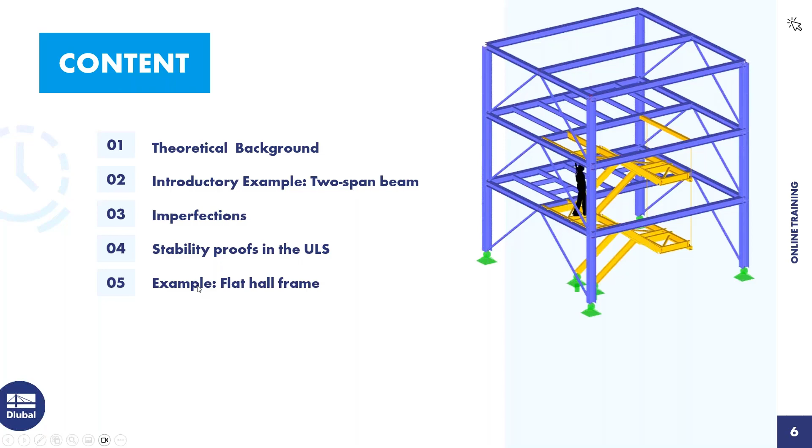So to the content today: at first I say something about the theoretical background. Then we start with the first example, a simple two-span beam. I say something about imperfections, geometrically nonlinear analysis or second-order theory and so on. Then I say something about the stability proofs in the ultimate limit state design. And we finish the online training with the second example, a flat hall frame.

Okay, before I come to the products for design according to Eurocode 3, I have one question. How much experience do you have in steel design? I start the poll. Just click on the button that is valid for you. I give you some seconds. Just click on the button professional, or it's new for me, and so on. Okay, then I close the poll.

So that's the result. I'm professional, 33%, but also 33% checked it's new for me. Okay, I hope also the professionals will learn something about steel design today.

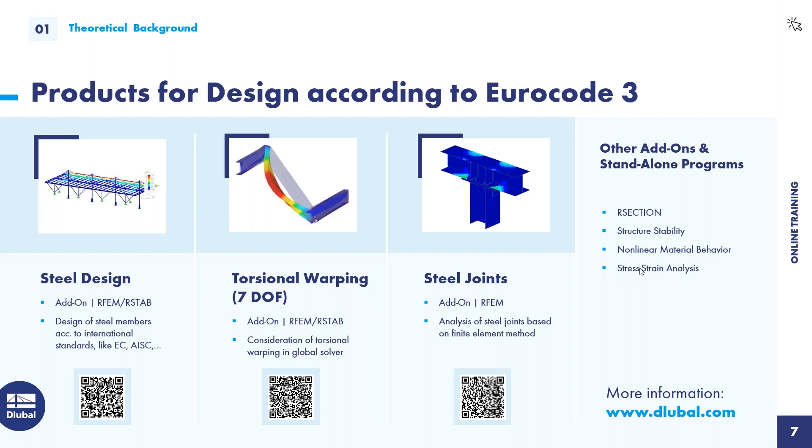Okay, a little insight into the whole safety concept in steel construction. The actions should always be smaller than the resistance. In addition, we have certain coefficients that we have to take into account depending on what type of proof is used. For example, for the stability analysis, there's a different safety factor for the basic standard and the national annex of Germany. Just consider the national annex of your country. But I believe in most cases it's the standard factor from the Eurocode.

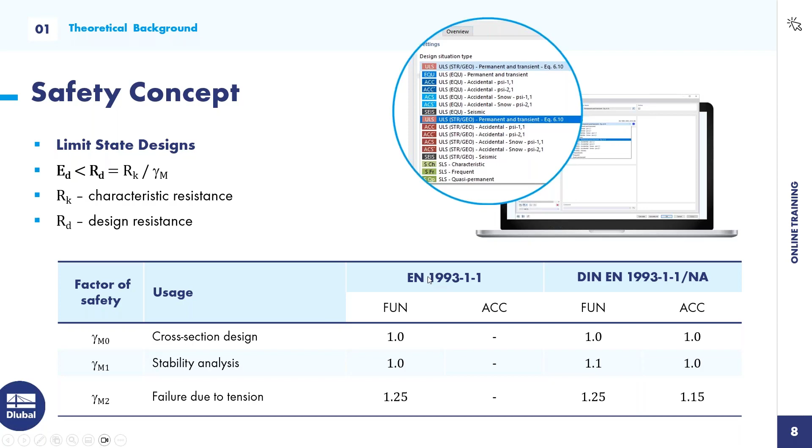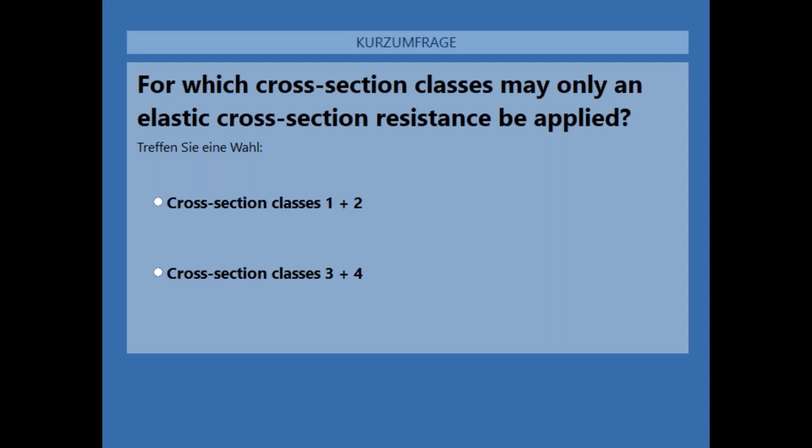So I close the poll. Really good. All of you checked the right button or gave the right answer. Great. Okay, then we turn to the next slide.

Two-span beam. That's the first simple example. It's a two-span beam. The beam is an IPE 550, and I've got 2 load cases. And tasks are cross-section classification, cross-section design checks, difference between elastic and plastic cross-section resistance. Means the design check elastic elastic, and elastic plastic.

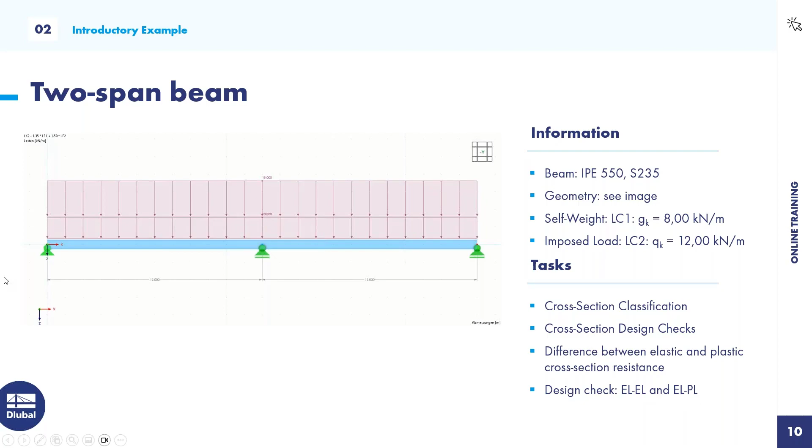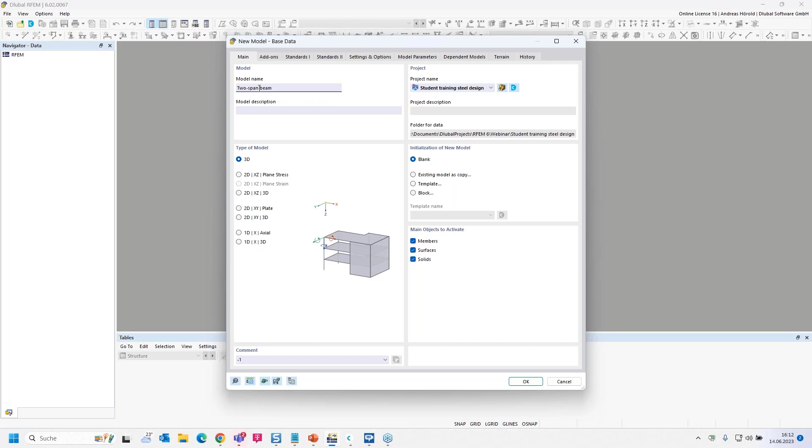Okay, let's turn to RFEM 6. I create a new file here, left above, file new. So the model name is two-span beam. I use the 2D model. That's enough for this example. It's only one beam, plane stress. Then I activate the add-on steel design.

Standards. Okay, I checked the German National Annex. You can see there are also different standards available for the load case classification. I select the Eurocode and the German National Annex. The same for the load wizards, but we don't use any load wizard in this example. Doesn't matter. Then here the different standards, the international standards, as I mentioned. I use the Eurocode and the German National Annex. That's all. Okay.

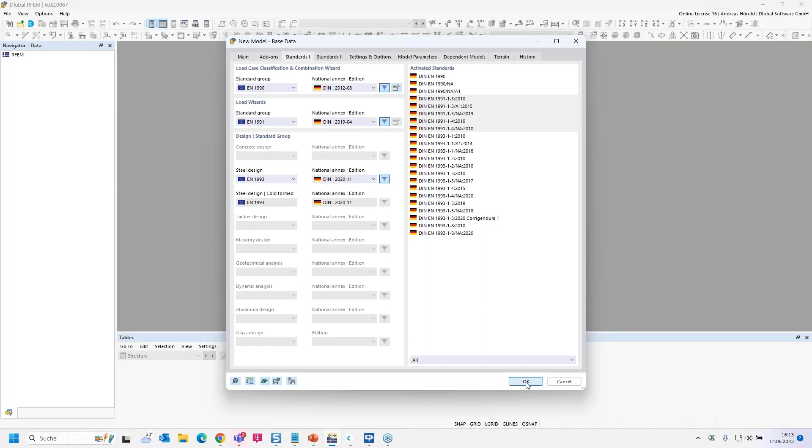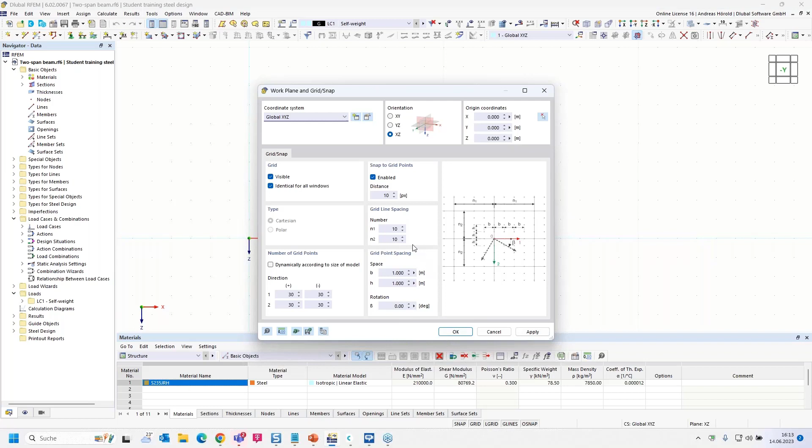So then I change the work plane or the visibility view in reverse Y direction. Zoom a little bit in. Okay. The grid, we can check the grid. The space is 1 meter. Here at the bottom, grid. I open the dialog, and the grid of 1 meter is okay. Okay, then left above, new single member.

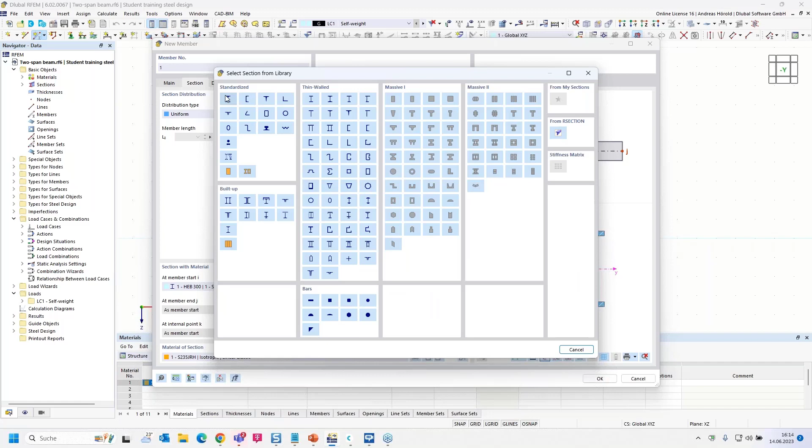Beam is okay. Then we have to define the cross section. There's already an HEB 300, and we change it with input from section library. We open the library. Standardized, left above. And I choose, as I mentioned, for example, this one, IPE 550.

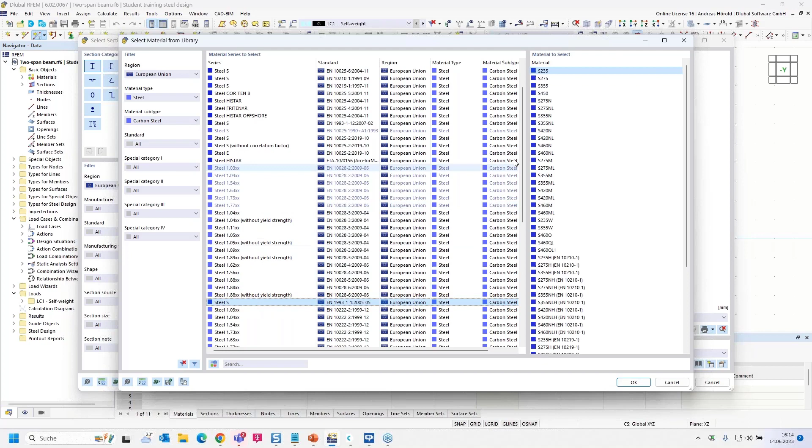And I need to select the material. There's already S235 selected, but I open also the library. So European Union is okay, steel, and I choose any steel that I want, or I check on the left side carbon steel and the simple steel S235. Okay, so that's all.

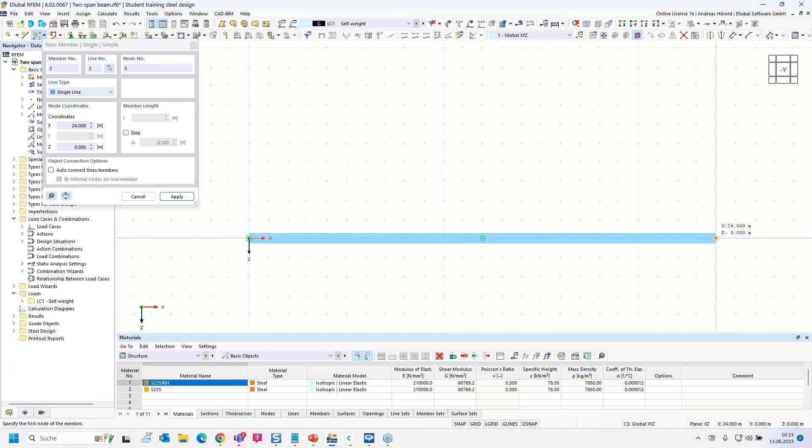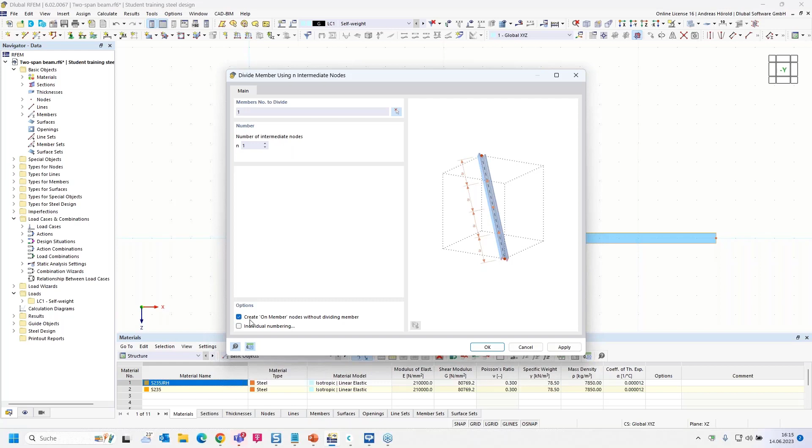So now I create the beam, the whole beam, 24 meters. Okay, and I divide the beam here in the middle with right click on the beam, then members, divide member in intermediate nodes. One node is okay, and I don't divide the member, I will only create a node on the member. That's why I check create on member nodes without dividing the member. Okay, so that I can apply a support here in the middle.

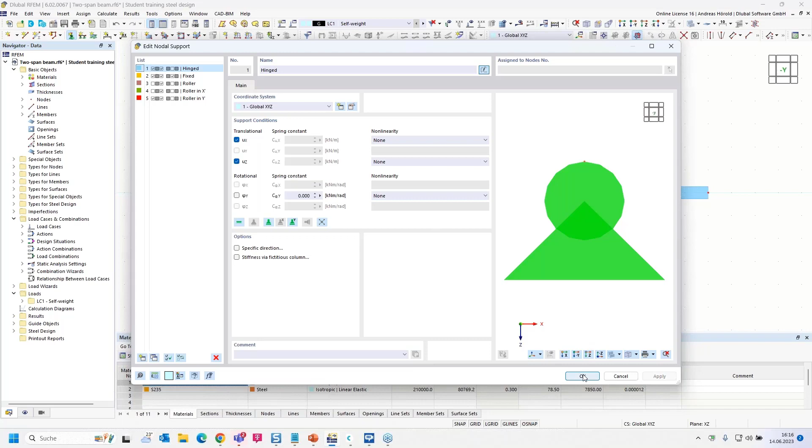So we start with the first support here, left above, assign nodal support. I click on it and let me check the proposed nodal support. Yeah, that's okay. Translational in longitudinal or in X direction and in Z direction. Okay. This one. Okay, it's very small. That's no problem. I right click on it and increase the size of the support. It's only a display setting.

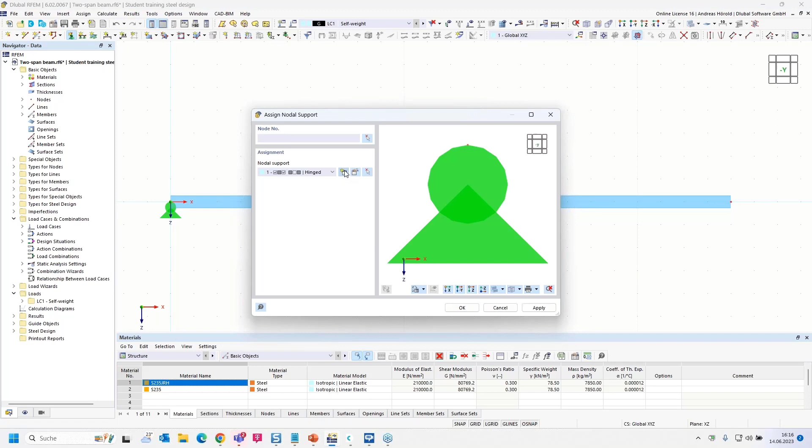So then the next supports, I define a new support. It should be fixed in Z direction, but not in X direction. Okay. And I select this node and this node. Okay. We finished the beam. The self-weight load case is already created. I enter a new member load here at the top. New member load. 8 kilonewton per meter in Z direction. Okay.

Just a hint, if I'm too quick for you, we think that it's best that you only watch the webinar without any modeling, and later you can go through the webinar with the recording. We provide the recording, and then you can stop the video and model not so quickly. And that's the sense of such online training.

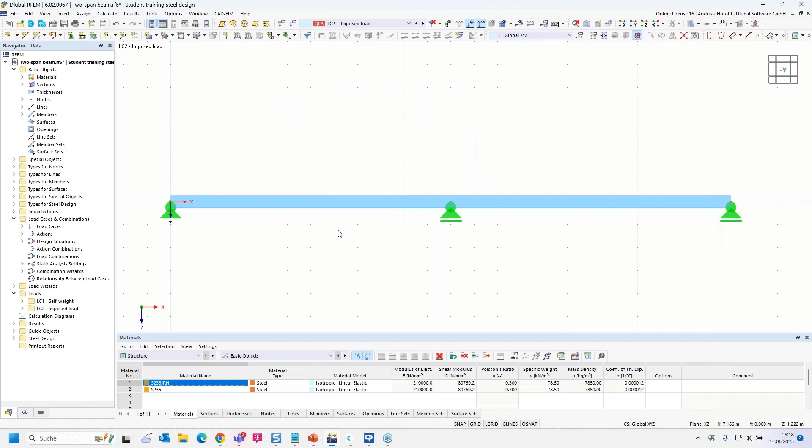Okay, then here above, new load case. And with a click on this button, we turn to the load cases and combinations. I enter the next load case, imposed load. I call it also imposed load. So, action category is okay, name is okay, and I can leave the dialog. Okay. And then I enter the next member load. 12 kilonewton per meter in Z direction. Okay. So that's all. We finish the beam and the loads.

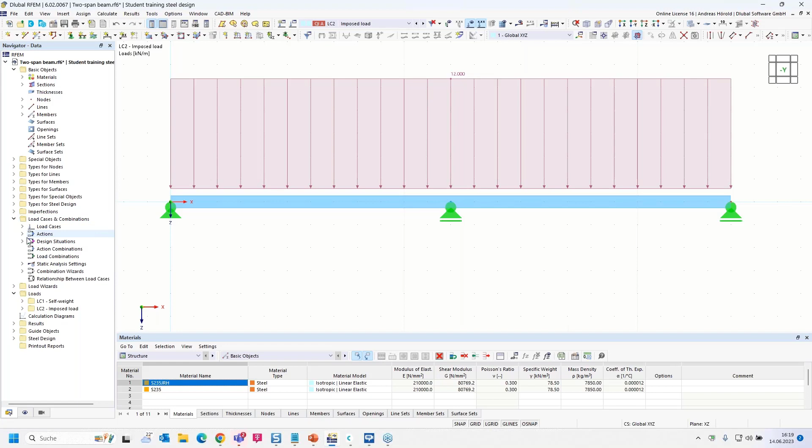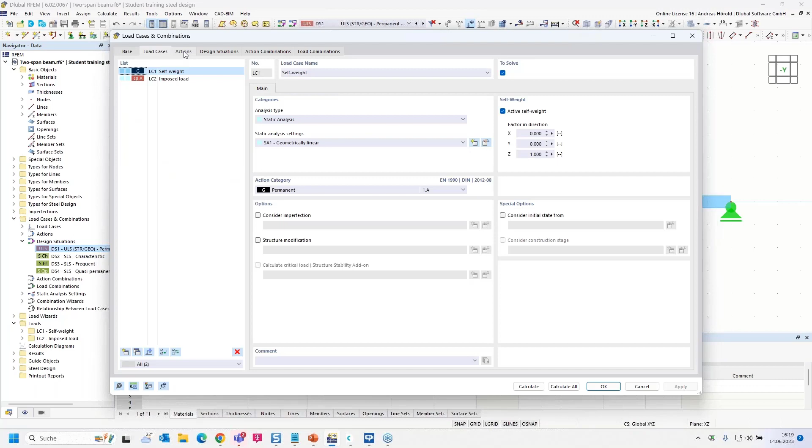We turn on the left side in the navigator data. We open the design situations. Now we open the same dialog. Those are the load cases. Those are the base data, the standard group, and the national annex. And we would like to use also the combination wizard. So we have got two actions and those design situations.

We would like to do only an ultimate limit state design. That's why I select with the Shift key all the three serviceability limit state design situations and delete them. Okay, the steel design is already checked. That's okay. Then there are action combinations and the load combinations. Only two load combinations. So then I can calculate all.

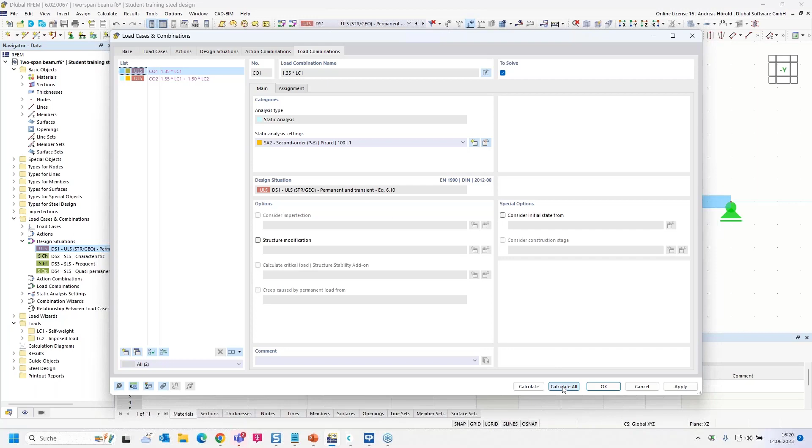So then let's take a look at the results for the ultimate limit state design. Here on the left side, you can see the two deformations, minimum deformation and maximum deformation. Now we have got two combinations. So I can check the envelope values, and I can also display only the maximum values if I want.

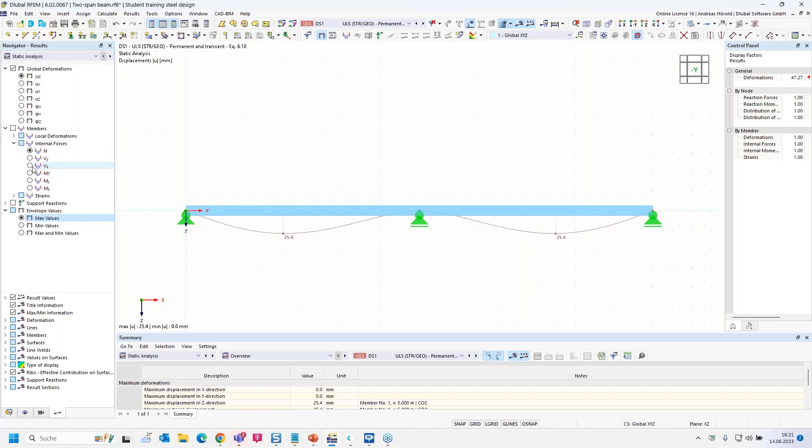So then members, let's take a look at the internal forces, the shear force, and the moment My. Okay, that looks quite good. At the bottom, we check the steel design. We can see the message here: no effective lengths or boundary conditions are assigned. The stability design could not be performed. Yeah, we want to do only a cross-section design.

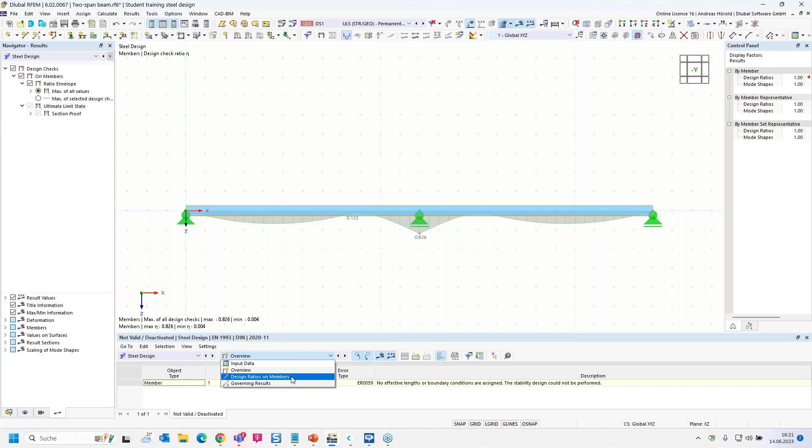Now, we assume the beam is supported in horizontal direction, and we do only a cross-section design. So that's why we go to the design ratios on members. You can see the two checks, the section proof shear in Z-axis, and bending about Y-axis. Okay.

So then you can double-click on such a line, or you can open the details with that button here. I check the button. And then you can see all the equations from the standard. Also for the shear design check ratio or design.

And you can see the section classification. It's class 1. That's why a plastic design, you can see that here, is possible. Plastic design also for the section proof bending about Y-axis.

Okay. And you can also print such equations with the hint where you can find it in the standard. With that button, print to the printer or to PDF or to the printout report. Students request a detailed presentation of the proofs, and that's possible. Okay, class 1, plastic design.

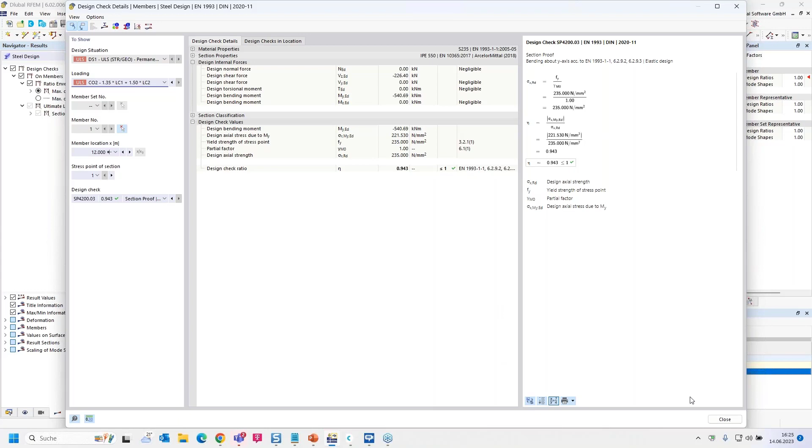So we have now learned how to carry out a cross-section check and how to take the elastic or plastic design into account. At first we did the plastic design, then the elastic design, as I mentioned, voluntary. And in addition, we now know how to display the design formulas and compare them with our own manual calculation.

So let me start the last poll for today. The question is, the elastic-elastic method applies to all cross-section shapes and can therefore always be used. Just check the right answer. Now remember that we did at first a plastic design and then we did an elastic design voluntary. Okay, then I will close the poll.

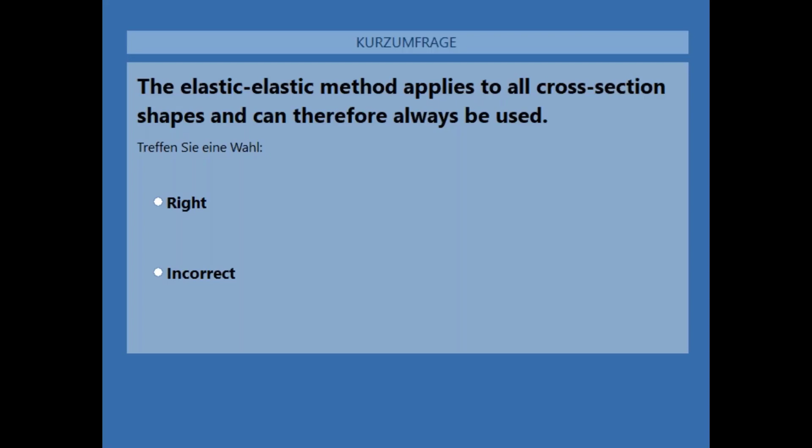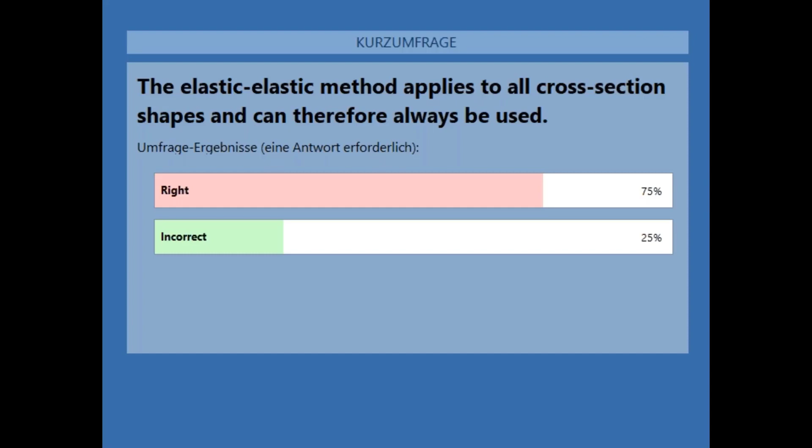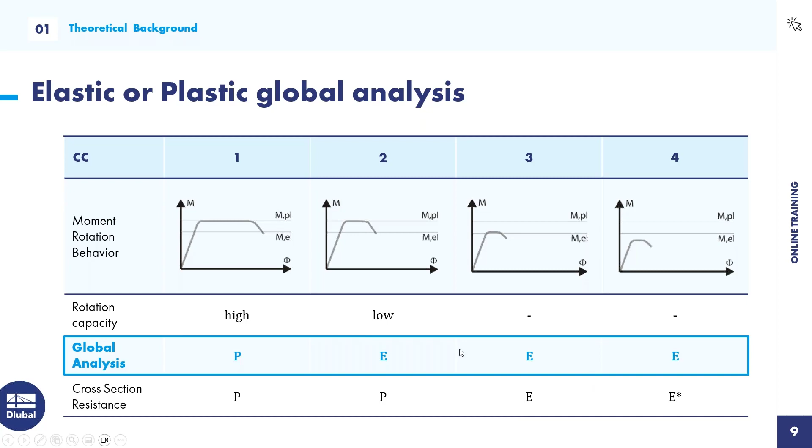So then we turn to the next topic: effects of deformed geometry of the structure. In the first training course, Introduction to Member Design, it was learned how the results can differ between the calculation according to first order theory and second order theory.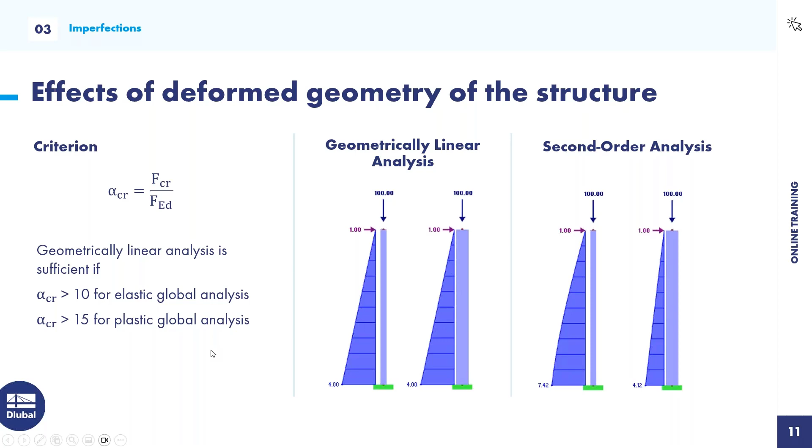And 15 is the value for plastic global analysis.

Equivalent geometric imperfections are also closely related to this topic. Here we have the imperfections in Eurocode 3, where these are generally grouped together as equivalent geometric imperfections.

What are imperfections anyway? Imperfections are production-related deviations in the model geometry and the material properties. On one hand, there can be real misalignments in classic hull constructions or tolerances in production, especially when rolled sections are used.

On the left side of the graphic, you can see the initial sway, global imperfection, that can be applied to the structure.

If individual components are to be examined more closely, there are local equivalent imperfections, for example an initial bow imperfection. This depends on the selected profile, the yield point, the buckling curves, and the proof method.

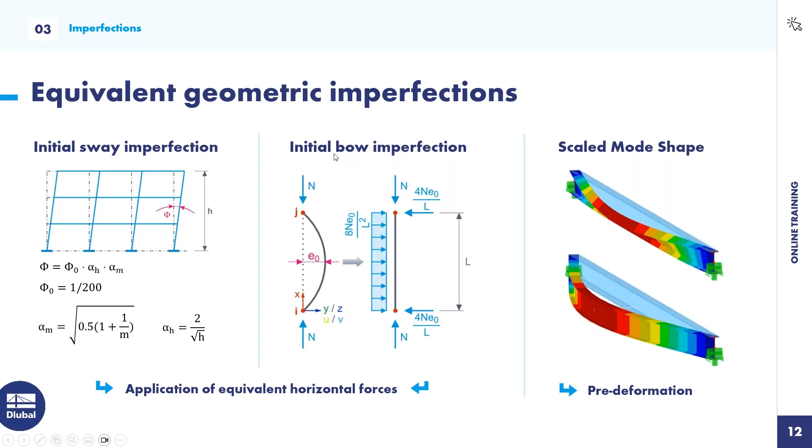So then the next slide, stability analysis. When designing in RFEM, three different stability analyses are carried out. On the left side, you can see the classic flexural buckling as a lateral deflection, then the torsional buckling in pure compression, and the lateral torsional buckling as a combination of the two previous proofs.

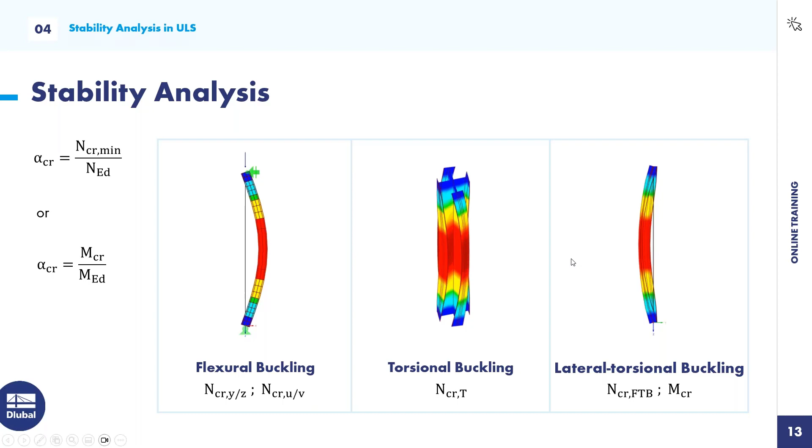So then the next slide is also very important. There are different methods for the stability analysis. Method A: you have to apply global and local imperfections, and you need to do a structure analysis according to the second order analysis.

Method B: you have to assign global imperfections and a structure analysis according to second order analysis, but with the member length, so you have to consider only the member length as buckling length.

Then method C: structure analysis according to geometrical linear analysis on the ideal structure. Then you consider the effects of the second order theory by using the real buckling lengths. Also mentioned here is structure component design on equivalent member according to section 6.3.

So in the next example, we will first start with method C and then use method B.

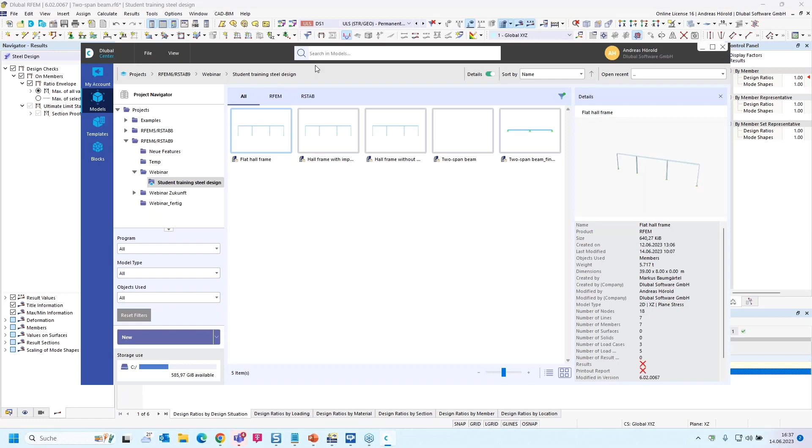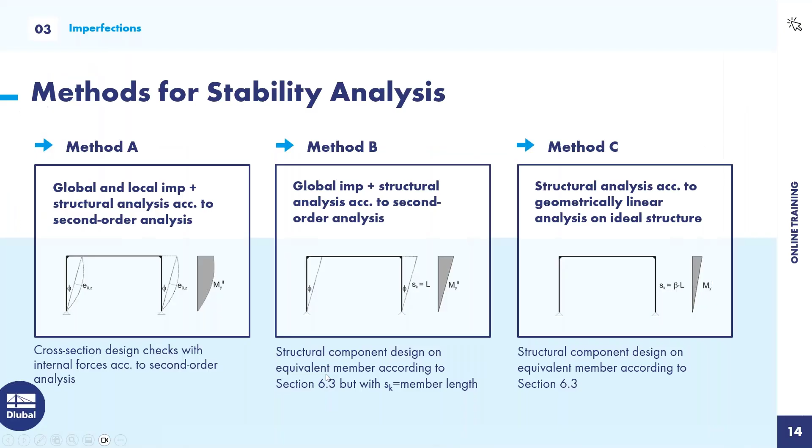Let me open it. I open the model, just a moment, I have to open the Dlubal Center. So that's the prepared model. Let me turn back to the PowerPoint slide, where also the model and the cross sections can be seen in the image.

That's the dimensions. There's one real frame here in the middle, then a connected horizontal beam and a column. There are hinges at the end of this horizontal beam, and the same is on the left side.

So then there are three load cases: self-weight, snow, and wind. The task for this example is to apply imperfections and perform the stability analysis according to method B and C. We start with method C, and then we apply imperfections and use method B.

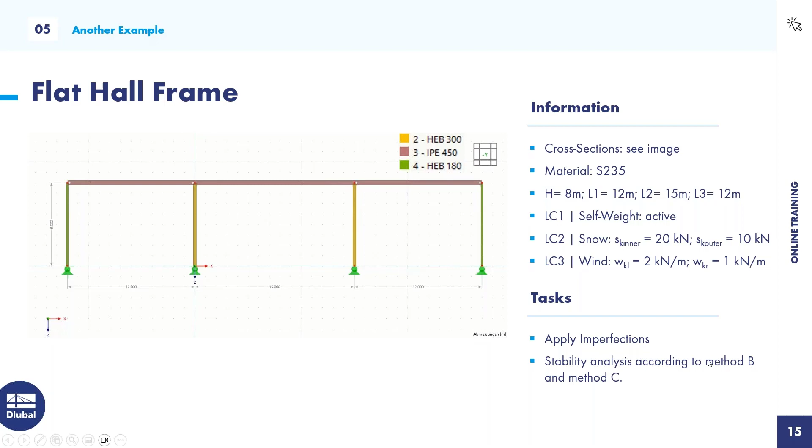So let's turn back to RFEM. So that's the model. I go left at the bottom on the navigator display, and I check for the members.

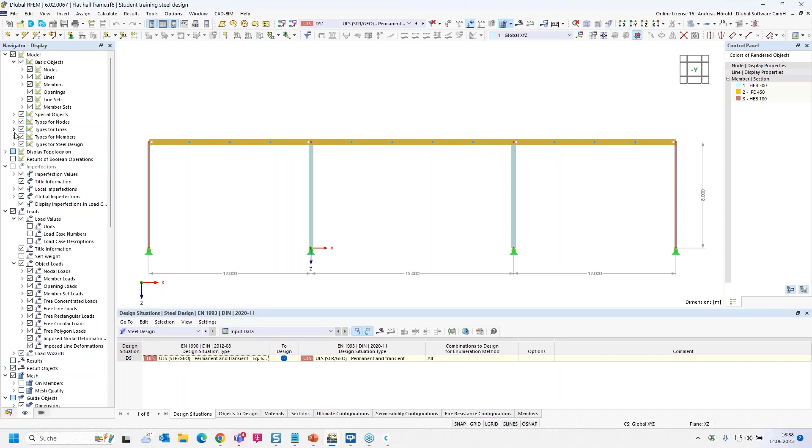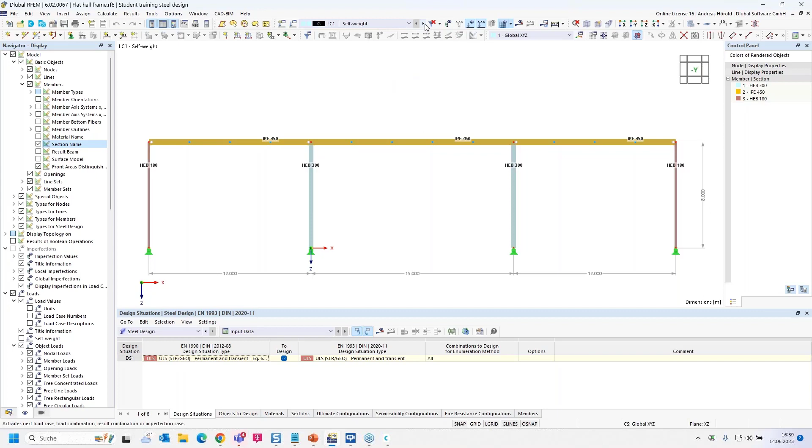So the section name, then you can see the different cross sections. Okay, so then the load - that's the self-weight load case, the snow load case.

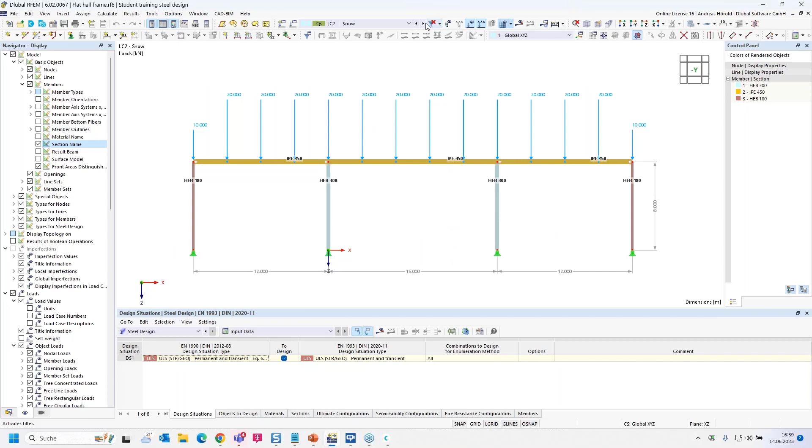So snow load case, and then the wind load case - wind pressure on the left side and wind suction on the right side.

So then we turn left above to the base data. Again, the model is 2D, plane stress.

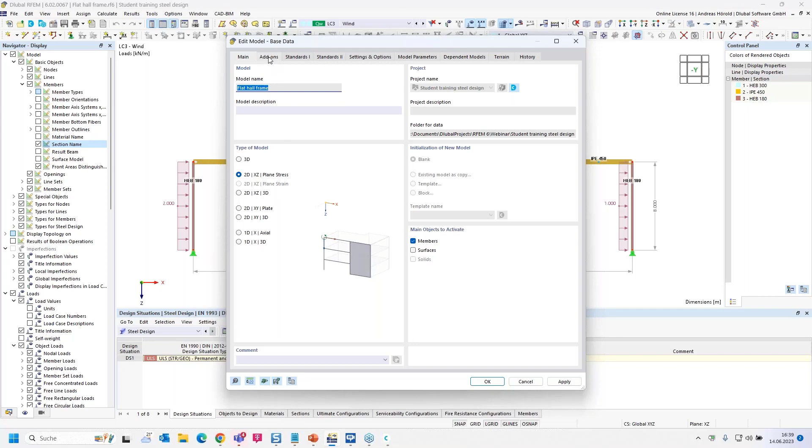Then the add-ons - I will use the structure stability add-on and the steel design add-on. Standards, as in the first example, I use the Eurocode and the German national annex. Just select your national annex if you want, or the standard European annex.

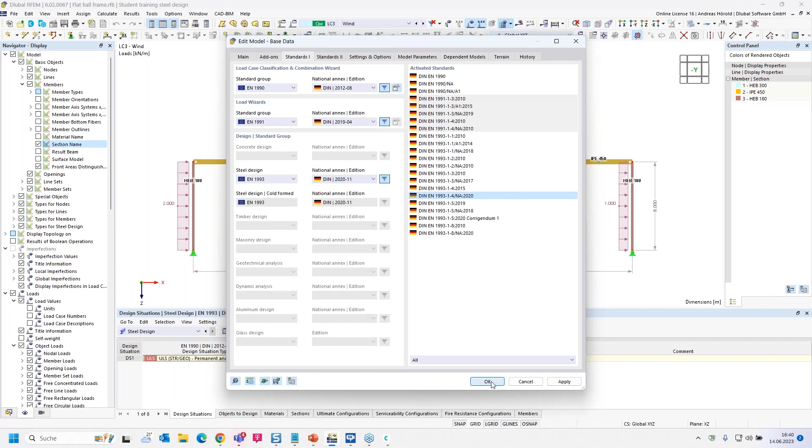Okay, so then we will use the add-on structure stability. How to do that? I go or turn to the design situation.

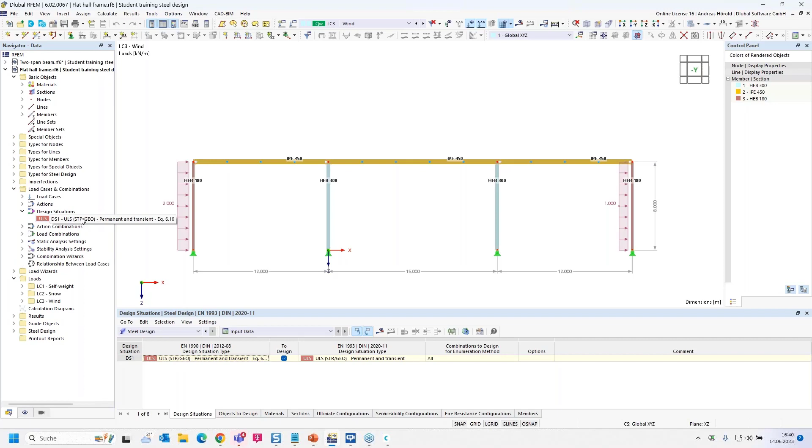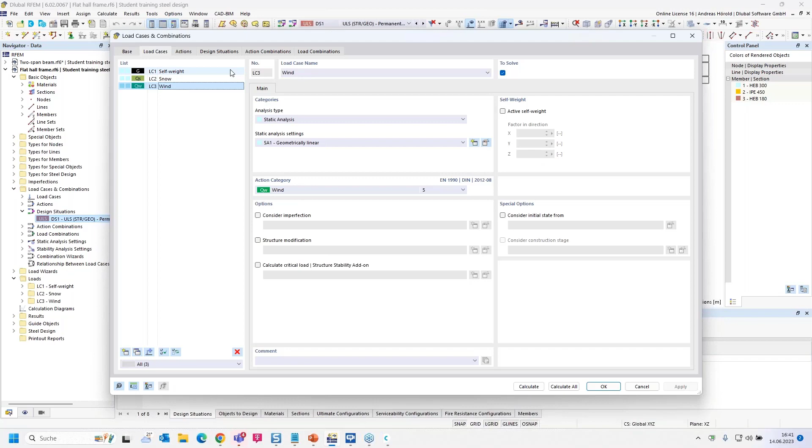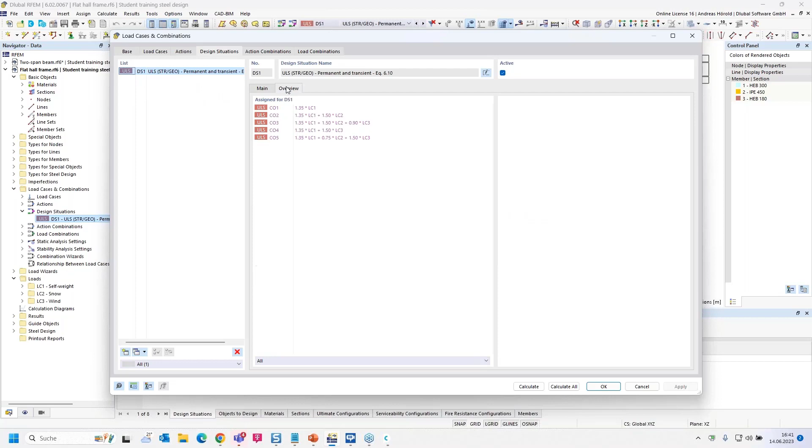There's only one design situation, ultimate limit state. Steel design is already checked. We can go through all the dialogues here quickly. Standard, the 3 load cases with the right action category, 3 actions, the design situation, and then the load combinations. And the design, also 5 load combinations, and the design situation contains all 5 load combinations.

Okay, and in the first step we would like to do a geometrical linear analysis, and I open it. I can check this button here to edit it. So, and I would like to do a stability analysis. Okay.

And I can calculate the design situation.

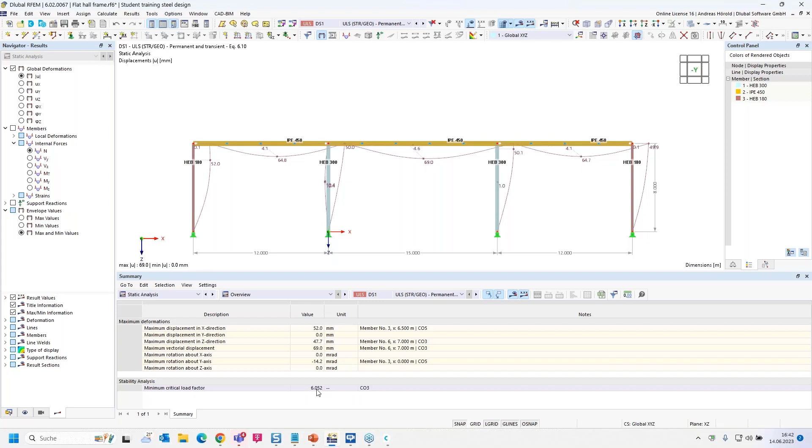Yeah, when you take a look at the table, design situation number 1, here you can see the minimum critical load factor if you want to see it, and the results by node.

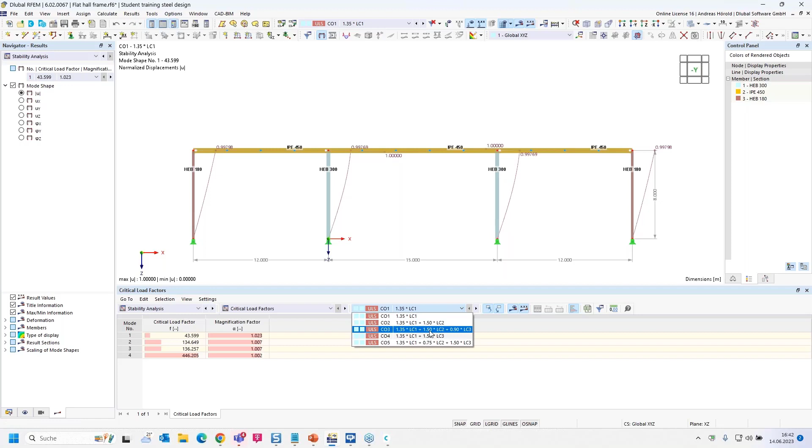We go to the stability analysis. You can also see the critical load factors, and we could see for combination number 3, where's the minimum critical load factor, and you can see the results by node and results by member.

And at the bottom, you can see the effective lengths. So let me increase the window. Yeah, for example, effective length factor 3 for this column. Yeah, almost 3 for this column. 1.73, I would say, for this column, and 1.73 for this column.

Yeah, and in the first method, the method C, we would like to apply the effective lengths. Now we would like to assign it to the different columns. So in the first step, I select the inner columns, double click on one. Now 2 are selected, and I switch to the design types, and I want to create the effective lengths.

So then nodal supports and effective lengths, and I select 3 for the axis Y. Yeah, and that's all. Okay.

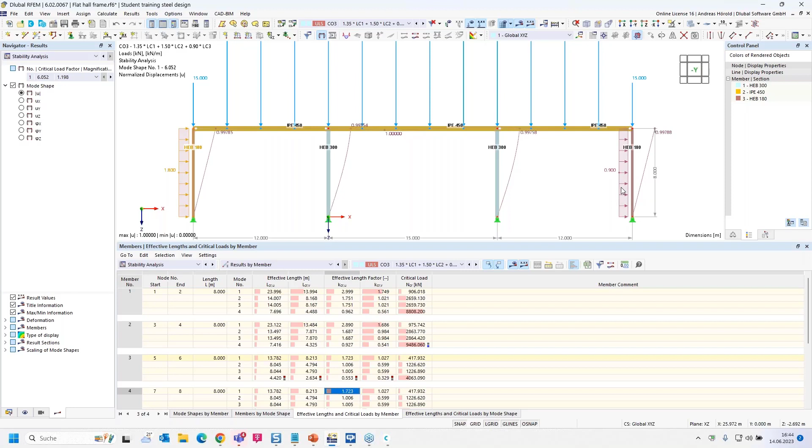So then I select these 2 with the control key - I can select both. You can see the plus here, I hope you can see it. So, and then I double click on the member.

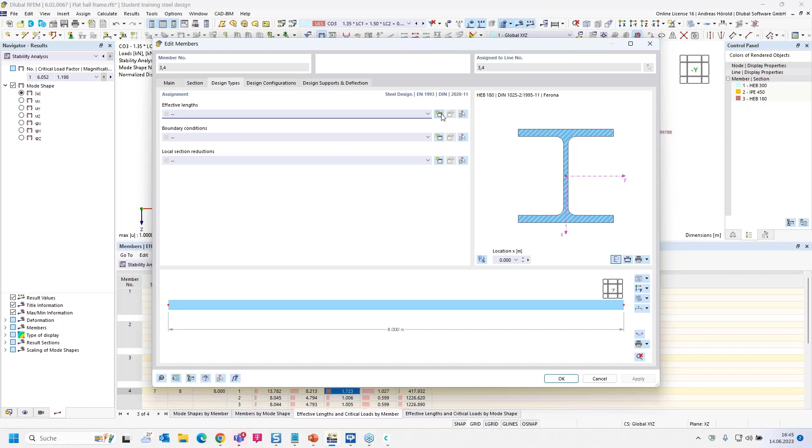The same for these columns - design types, effective lengths. Okay, and 1.73. Okay.

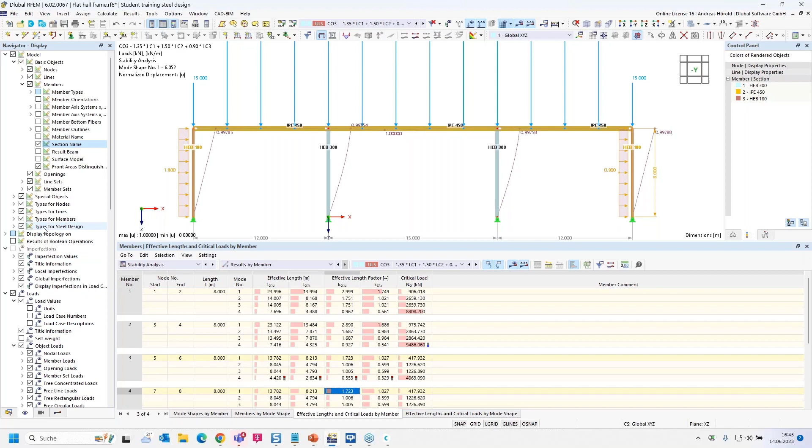So let's check if we did anything wrong. I go in the navigator display here at the bottom, then types for steel design, and I check member effective lengths. And you can see the different effective lengths, and you can compare it with the values in the table. I deselect the loads, and now you can see the values and can compare them.

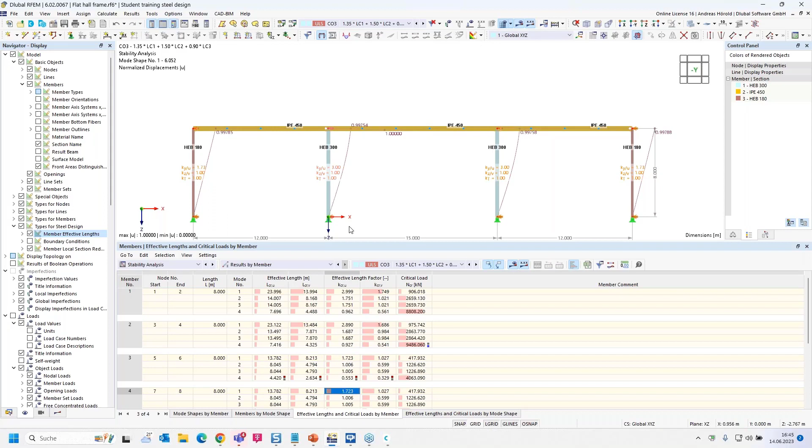Okay, before we run the calculation, I go back to the design situation. So, and now I select the second order analysis.

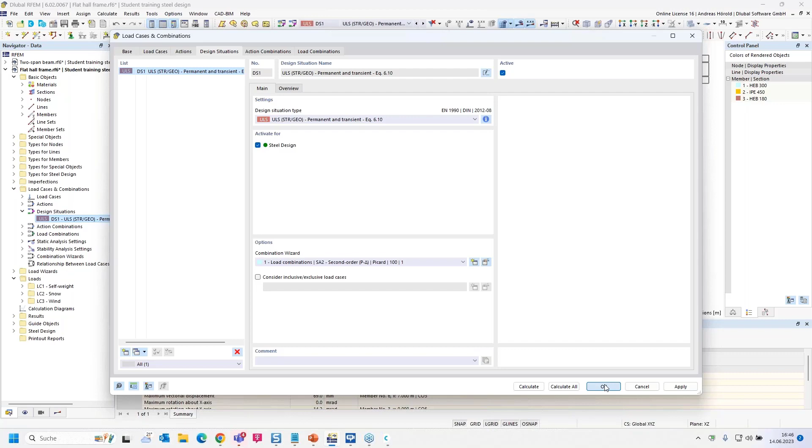Yeah, as I mentioned before, to do the design for flexural buckling, you could apply the geometrical linear analysis, but we also want to do a design for lateral torsional buckling. That's why we selected the second order theory. So, and to consider the lateral torsional buckling, I select the 3 horizontal beams.

That was wrong, just a moment. I press the control key, double click, now 5 and 7. Then, or let me do it another way - I double click only on the middle member, then design types.

I would like to show you an interesting effect, so I go directly to the effective length. I create another effective length. So then I go to the nodal supports and effective length, and then I use that button here, select member or member set. The program detects the intermediate nodes, and I would like to check or fix it in the Y direction, in the direction of the weak axis.

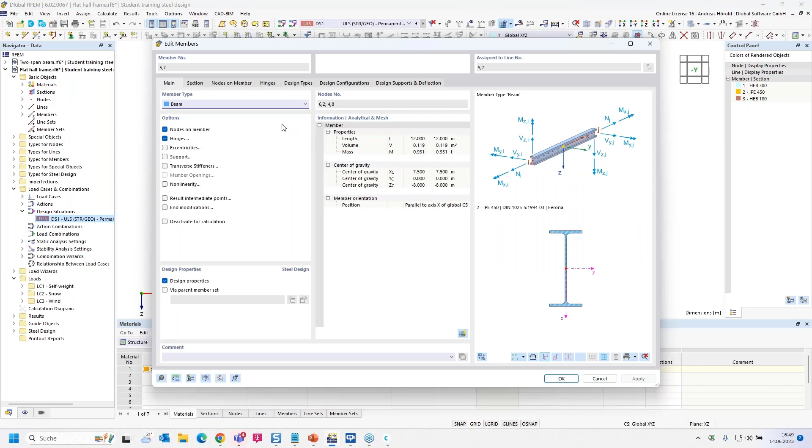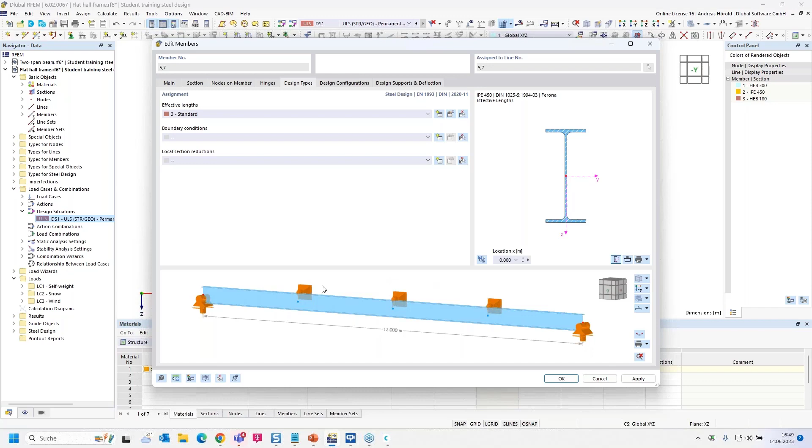Then design types, design type number 3. The program detects automatically that there are only 3 intermediate nodes, and it considers the same horizontal supports, although there are only 3 supports. The inner beam has got 4 supports. Now we have only 3, but the program detects that automatically. So now we can run the steel design.

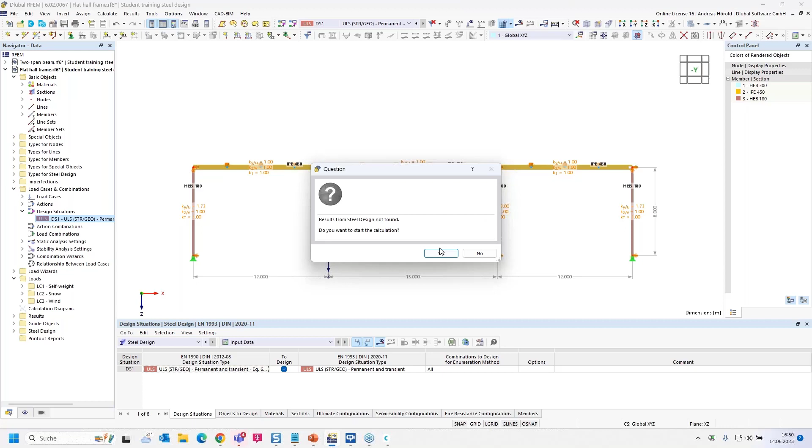Okay, so let's take a look at the section proofs. The maximum design ratio is 84%. Bending and buckling about the principal axis.

Let's double click on that line, and you can see on the right side the formulas, to hint where you can find them in the standard, and so on. Okay, I can leave the dialog.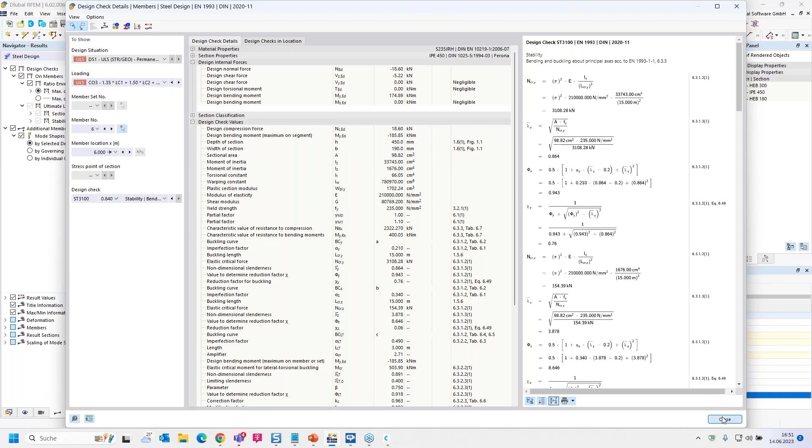Yeah, this was the classic structured component method, method C, without imperfections but with effective member lengths. Now we want to examine the model using the approach of global imperfections and the structural component design, which means method B.

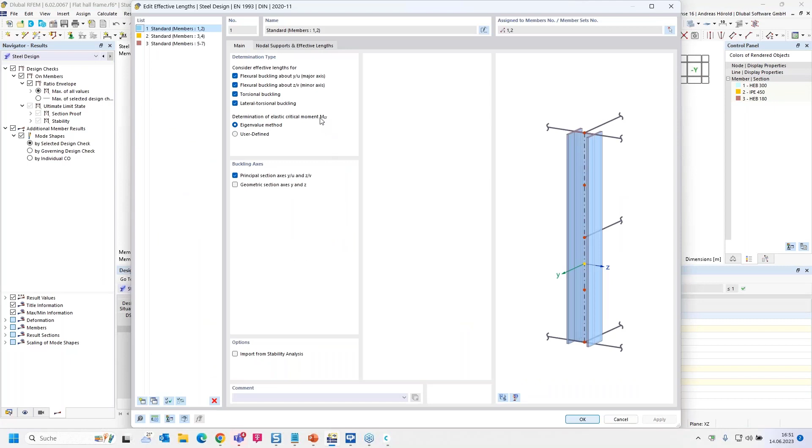To do this, we change the buckling lengths or the buckling length coefficients of the supports back to 1. I mean the buckling lengths of the columns. So I select them, this one and this one, and change it back to 1. And for this one, also back to 1.

Okay, yeah, the results are deleted. And you can see the buckling length factor of 1 for all columns.

So then above, you can see the imperfections, new member imperfection. I click on it, and the imperfection case is created automatically.

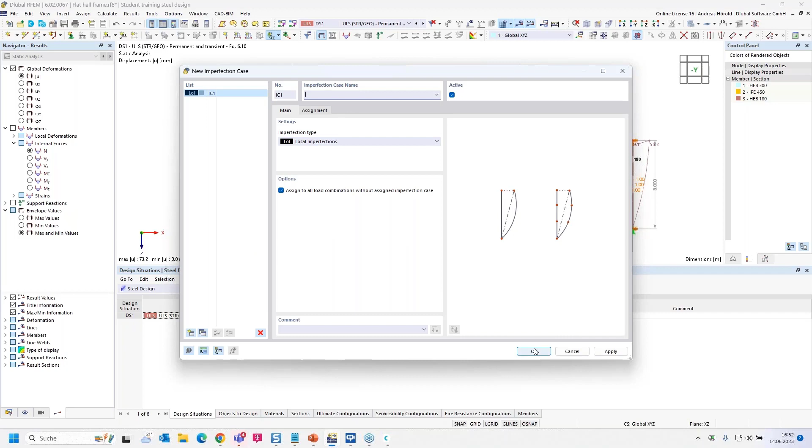Now we want to apply initial sway. You can also see initial bow, but we use method B, that's why we use the initial sway. You can see the different definition types and the different standards. We use Eurocode 3.

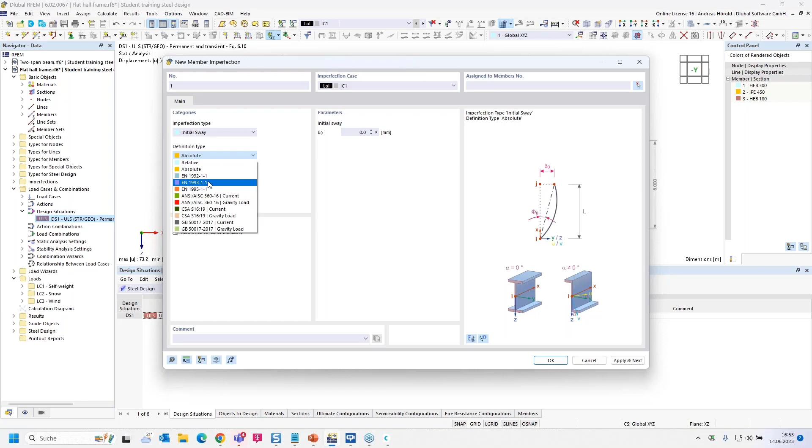In imperfection direction, in the direction of the strong axis in our case, in Z direction. Okay, then we have to measure the structure height with that button here. So member height should be 8 meters. Okay, the program takes it over.

The number of columns in one row is 4 in our case. And you can see the reduction factors and the initial sway are created automatically.

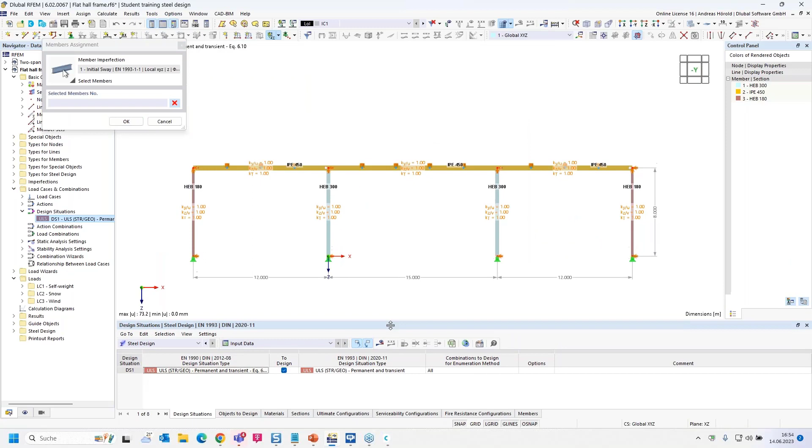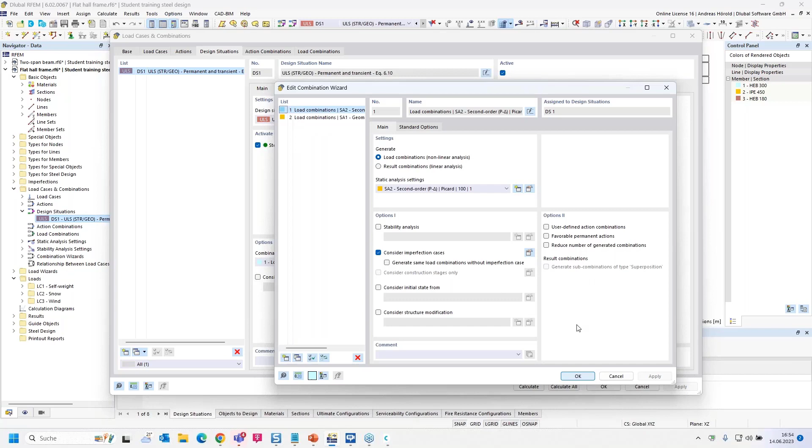That's all. We only have to turn to the design situation again, and we need to check if the imperfections are checked on. Yeah, we can edit the setting here. Yeah, it's checked on. Consider imperfection cases, that's quite important.

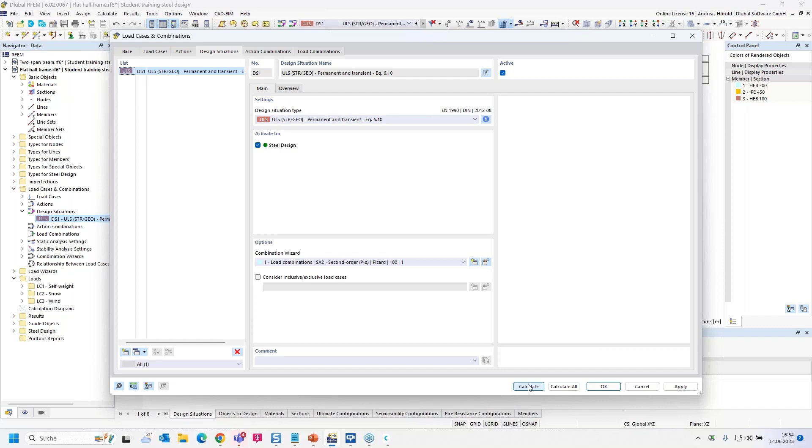So, and we can run the calculation. So we need to perform the steel design as well. So I increase the table here.

So, and you can see the same design ratio. We can take a look. Okay, no, I did something wrong. I didn't select the imperfections. Where are the imperfections?

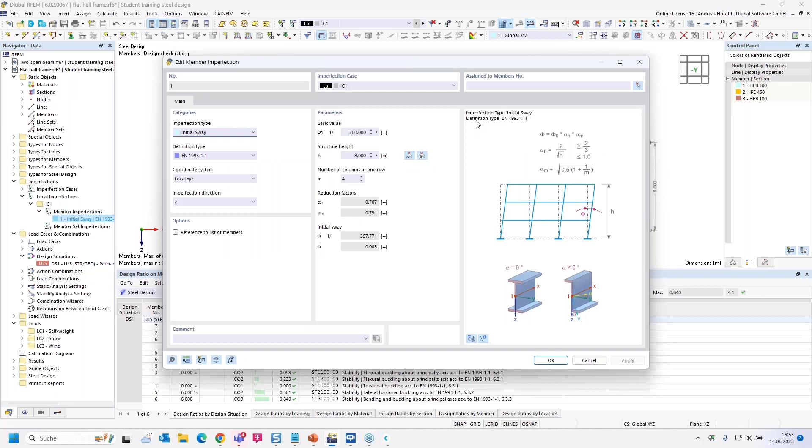Just a moment, imperfections. I didn't assign them to the different members. I created the imperfection, but I didn't select all 3 columns. Sorry, my mistake.

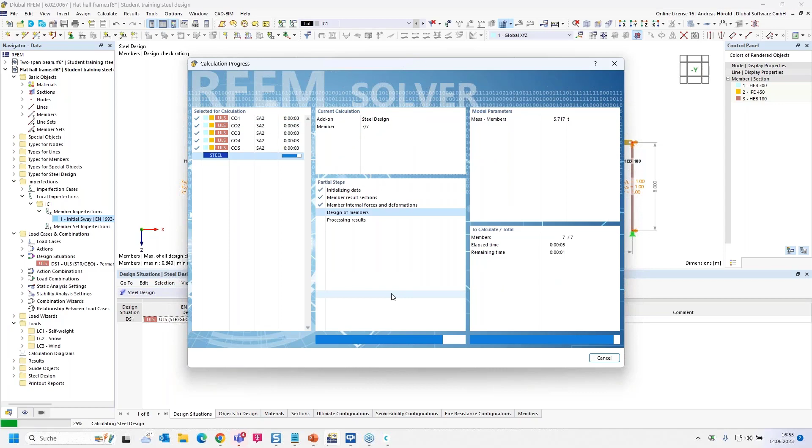We need to run the calculation again. I just wondered where we got exactly the same result. It's almost the same result now for method B. We had 84% for method C, and now we've got 86%.

You can see the equations again here in that table. Okay, those are the two methods. We did first method C, and then method B.